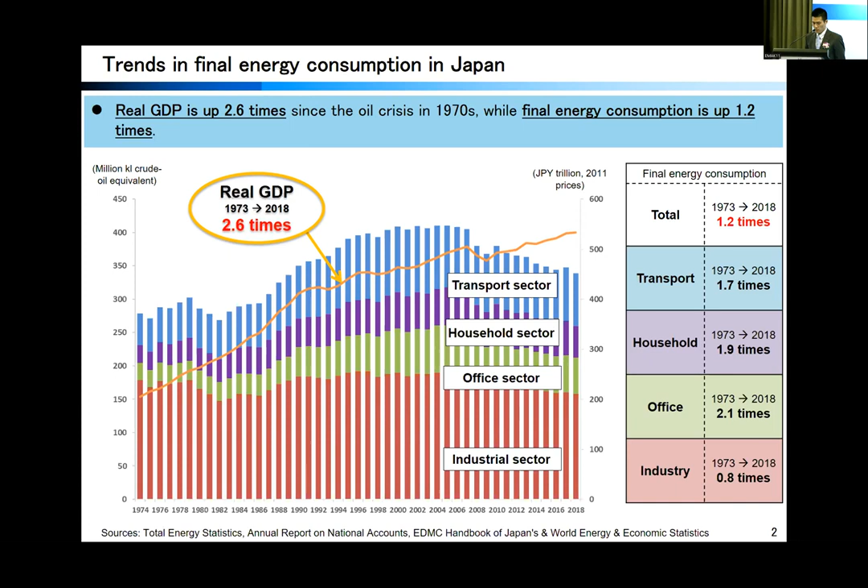First, I would like to start with a comprehensive overview of energy consumption trends in Japan. This picture shows the trend in final energy consumption for each sector and real GDP starting from the 1970s. Real GDP has grown 2.6 times since the oil shock in the 1970s, while final energy consumption is up only 1.2 times. This is because of the improvement in energy efficiency.

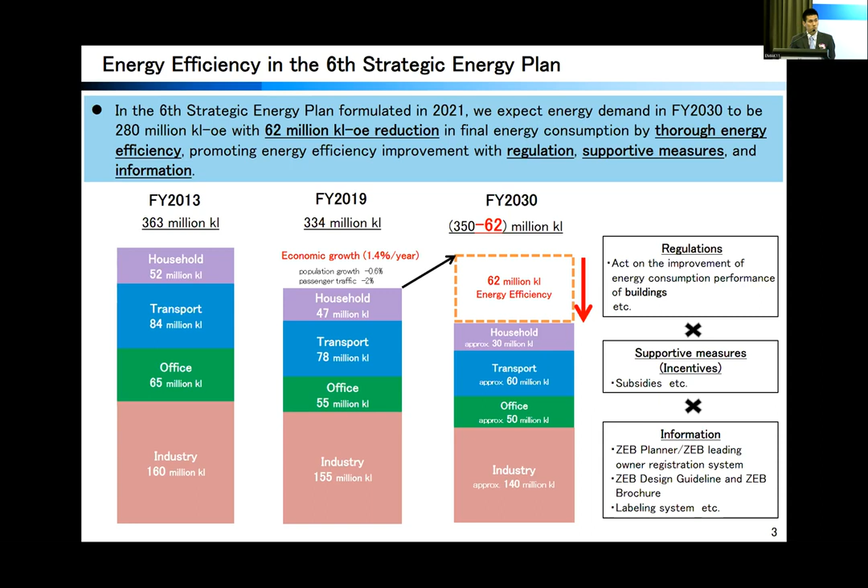Next, I would like to explain the concept and approach towards the net zero energy building, so-called ZEB. First, I'll explain what ZEB is, which may be very basic, but I think it's very important.

ZEB is a building with considerably reduced annual energy consumption, following three steps. First, saving as much energy as possible through high heat insulation, solar shading, and utilizing natural energy such as daylight utilization and natural ventilation. Second, improving energy efficiency by utilizing highly efficient equipment such as air conditioners, ventilation systems, and lighting, along with effective energy management. Third, creating energy with, for example, PV power generation.

It should also be mentioned that these efforts should be done while maintaining a comfortable environment. These are the points for realizing ZEB.

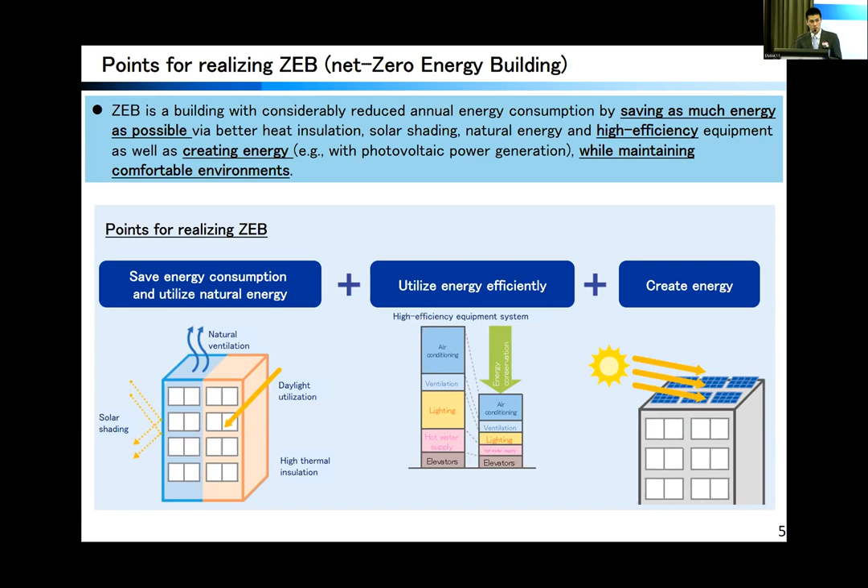As Mr. Hoshino and Mr. Ichinose mentioned, ZEBs are classified into several types according to the amount of energy reduction from the reference primary energy consumption. This classification allows ZEB to expand its scope, enabling and promoting a practical step-by-step approach towards net zero.

A building with 50 to 75% net reduction from the reference primary energy consumption is defined as ZEB Ready, while 75% to 100% is nearly ZEB, and 100% or more is net ZEB. These three are also defined in the ISO technical specification formulated in 2021.

In addition to these three, ZEB-Oriented was newly added in 2019. This one is for larger buildings with a total building floor area of 10,000 square meters or more. Because large buildings are more difficult to reduce energy consumption in, this category was added to expand the scope of ZEB and stimulate efforts.

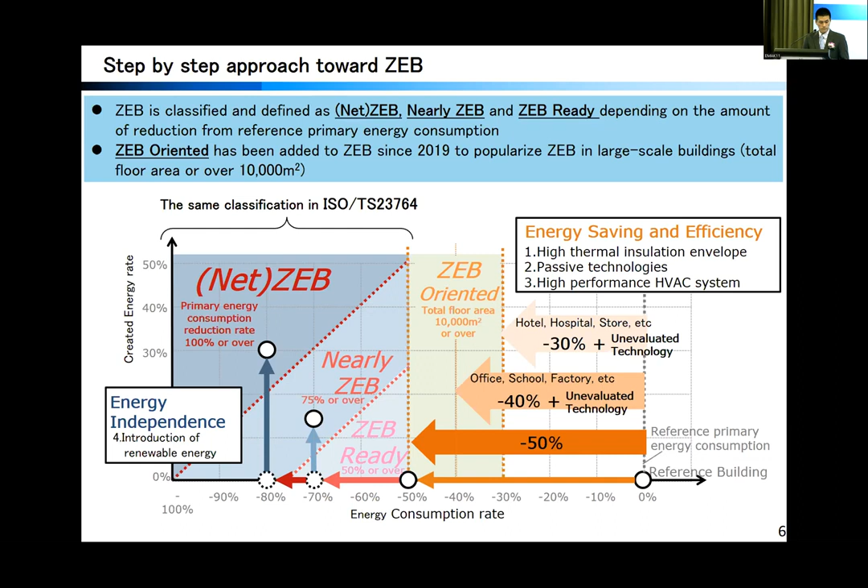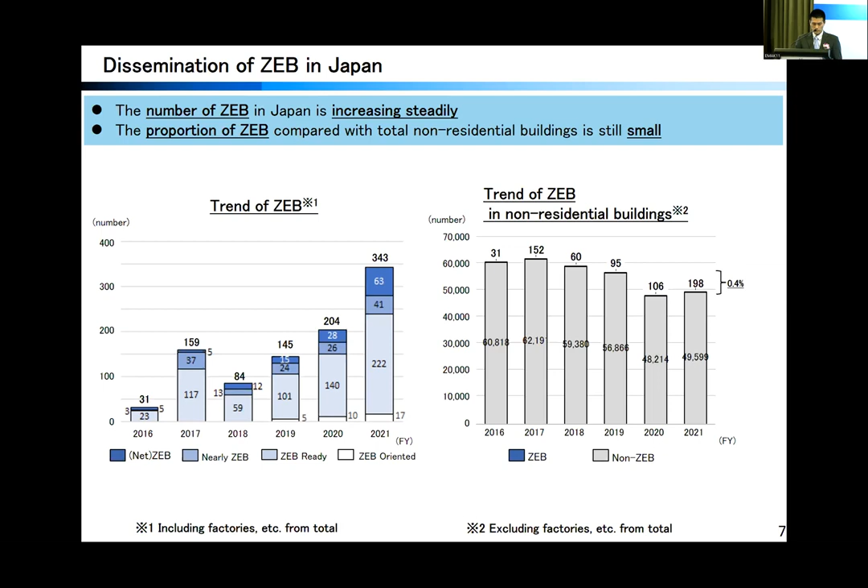A total floor area of 2,000 square meters or more is classified as large scale, 300 to 2,000 square meters as medium scale, and less than 300 square meters as small scale. Until now, compliance with the energy efficiency standard has been mandatory for medium and large scale buildings and voluntary for small buildings.

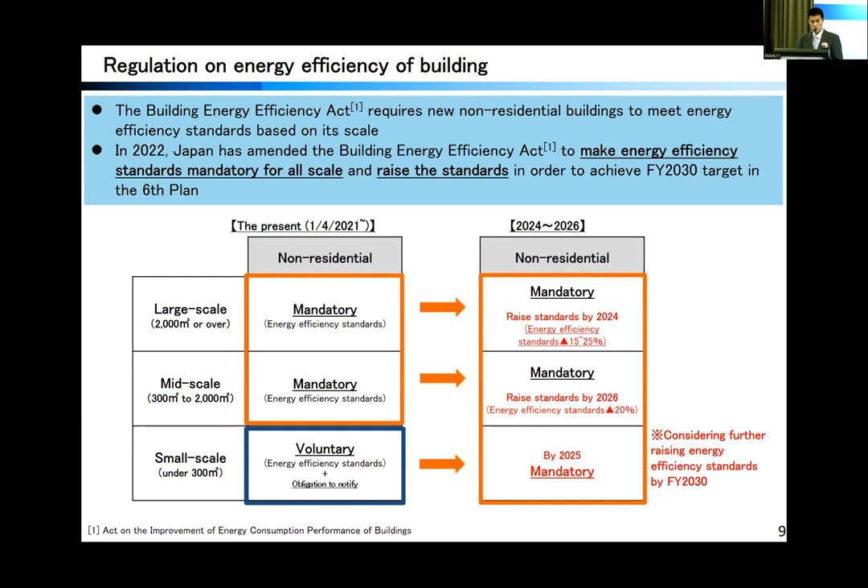Those for medium size buildings will be raised by 20% by 2026. What is more, further increases in the standard are being considered in order to achieve the sixth strategic energy plan by 2030.

In general, METI supports large-scale projects such as new buildings of 10,000 square meters or more, and existing buildings of 2,000 square meters or more.

What I would like to emphasize is that the requirement for applying for METI support includes the introduction of an unevaluated technology. I will explain this in detail in the next slides.

In addition, in both support programs, there are some mandatory requirements to apply for the subsidy project, which is related to the system for raising awareness of ZEB.

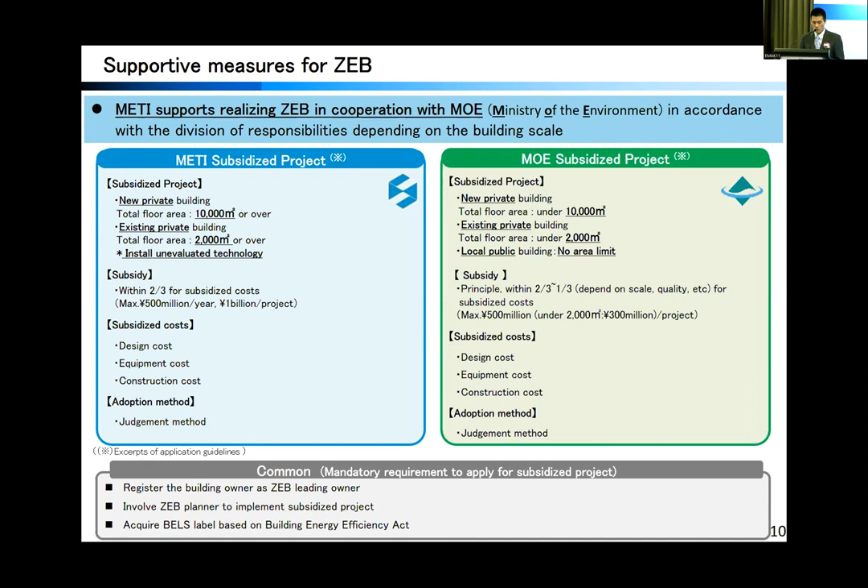Let me explain a little bit about the background and outline of the unevaluated technology required for METI subsidy. As I said, larger buildings are more difficult to make ZEB using only existing technology. So we aim to promote ZEB in large-scale buildings by conducting demonstration of new technology expected to have high potential to reduce energy consumption, so that they can be introduced in large-scale buildings.

Currently there are 15 items of unevaluated technology, and businesses will select some of them from this list. The unevaluated technology includes, for example, lighting zone control and natural lighting systems, and controlling the amount of ventilation air by monitoring CO2.

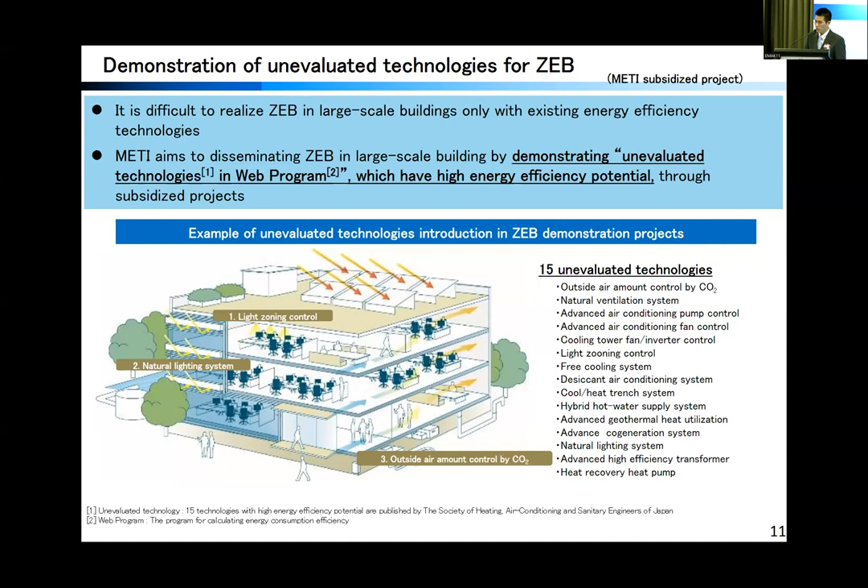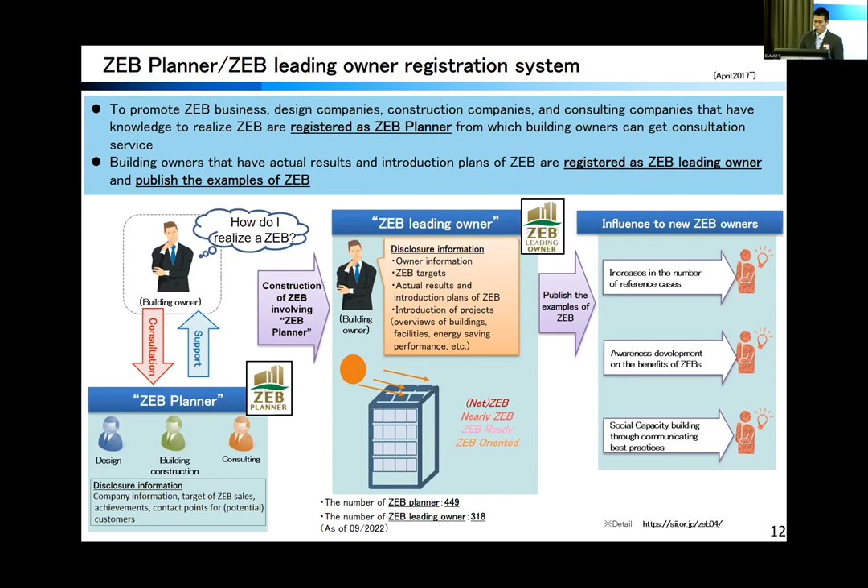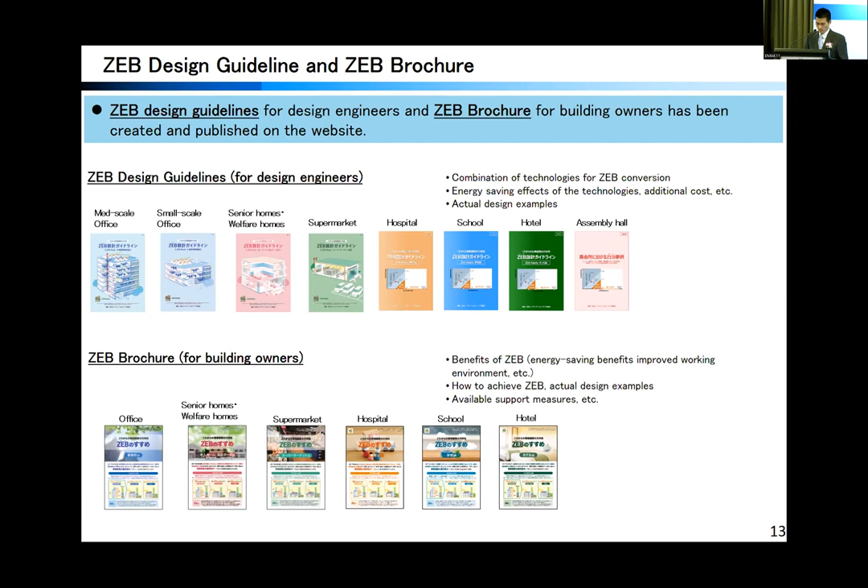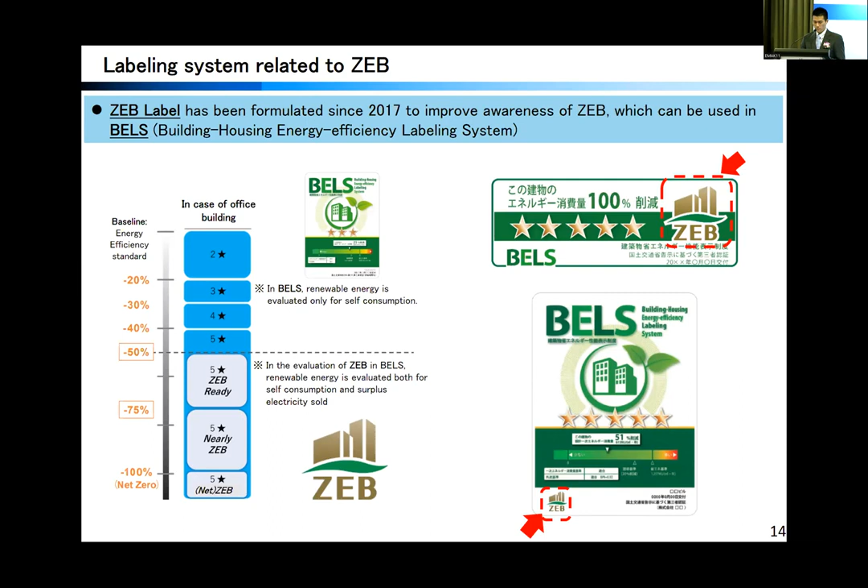So this is the effort of Japan towards net zero energy buildings. And this is a summary of my presentation.

First, I explained what ZEB is: a building with considerably reduced annual energy consumption by saving as much energy as possible, improving energy efficiency, and creating energy, while maintaining a comfortable environment.

Classifying ZEB as net ZEB, nearly ZEB, and ZEB ready enables and promotes a practical step-by-step approach towards net zero.

Japan aims to disseminate ZEB through regulation on building performance and support measures such as subsidies and information, such as the planner and leading owner registration system, ZEB design guideline, ZEB brochure, and the label system related to ZEB. This is the Japanese policy and efforts toward net zero building.